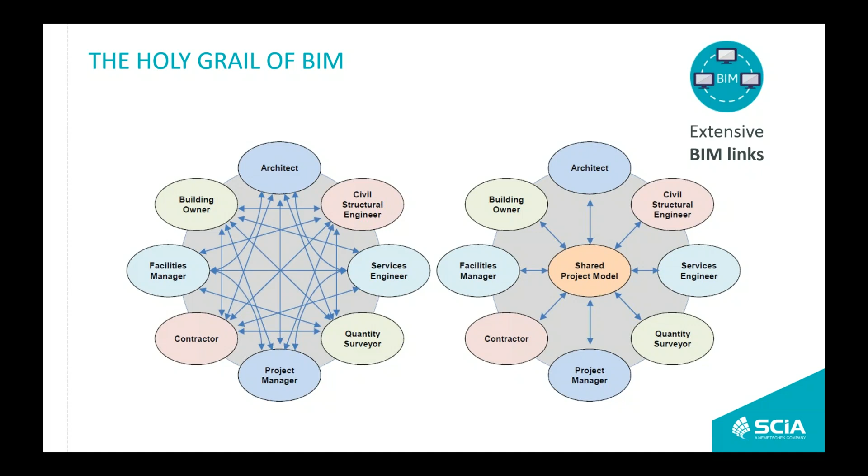Therefore, we are developing links with other software like Tekla Structures and Revit. But there is also one thing which should be clarified.

You can map, let's say, three models in practice. The first one is the architecture model, created by an architect in CAD software with all the details like furniture, cars, trees, people, etc. The middle one is related to the structural model, where you have some objects.

All the architectural details are removed, but it's still not what the designer needs for his work. The last model is the analytical model, which is the representation of the model with 2D and 1D elements, as we are used to in our daily practice.

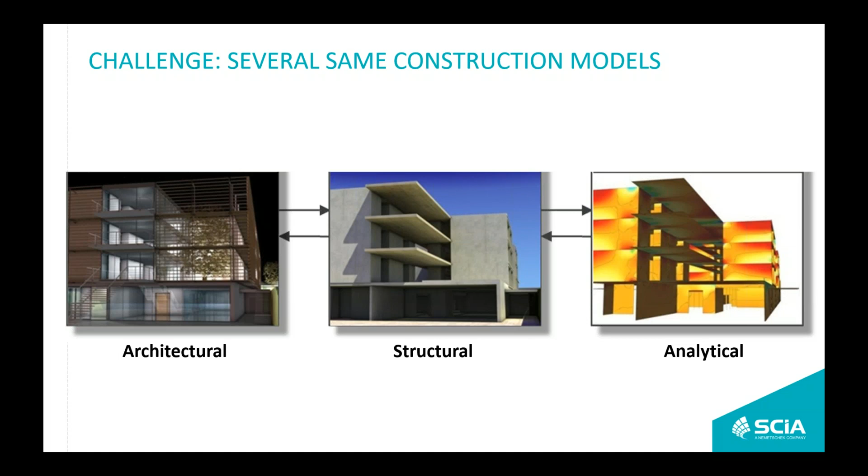I would like to concentrate here on two software packages, Tekla Structures and Revit. Both of these are able to create the last model, which is the analytical model, and we will work with this model in our webinar.

So let's start with the first link, which is related to Tekla Structures. Before we go to the details, I would like to ask you a very simple question: do you use Tekla Structures in your daily practice?

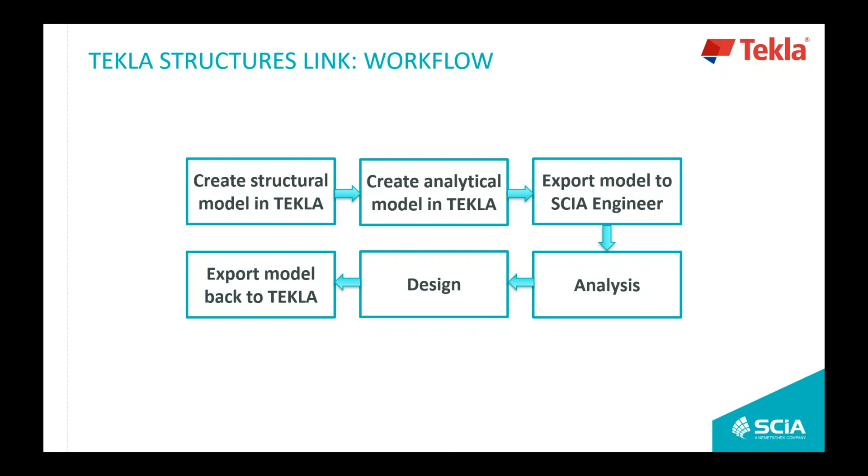That's, let's say, for me the ideal workflow between Tekla Structures and SCIA Engineer.

Here is what is currently supported in our link with Tekla Structures: the mapping of cross-sections and materials based on the Eurocode building standard and British standard.

Based on that, you are also able to import or export straight and curved 1D members, and import or export flat 2D members without openings. As I mentioned, we are able to export or import the analytical model, including supports, releases and rigid arms, and last but not least, export results from SCIA Engineer to Tekla Structures.

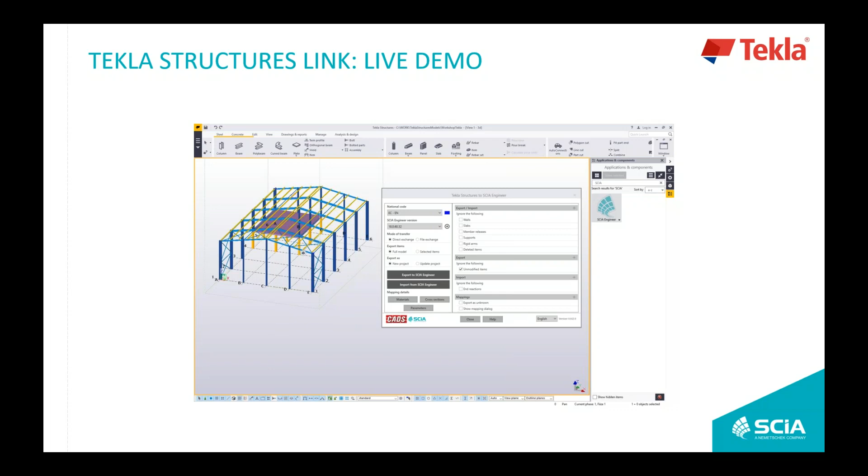And now it's time for the live demo in Tekla Structures. So I will switch to Tekla Structures. I hope you see my structure, which I got from my colleague, with concrete as well as steel. I have 1D and 2D members, and some bracings, and what I would like to do is export this model from Tekla to SCIA Engineer.

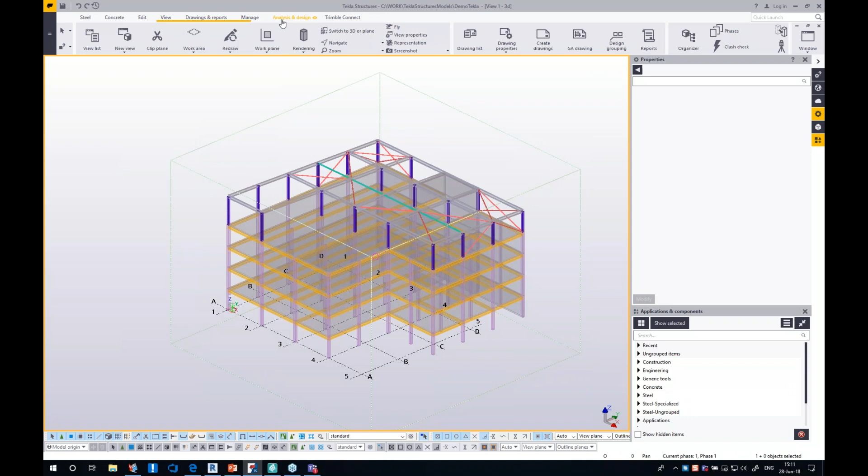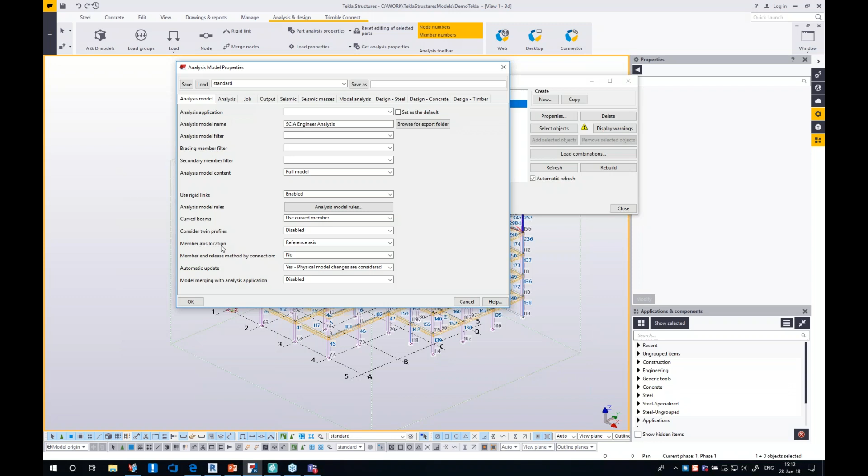What I need to do at the beginning is create an analytical model. There are several options for how you can do the analytical model - I have it prepared here. What's important is that you should pay attention to the member axis location to get a proper analytical model in SCIA Engineer. So I have my analytical model defined, as you see in the background.

Now I can just open the menu, application, component. I will start typing there, and with a double click I will see the dialog with the options.

So as I mentioned, I am able to select the national code, British standard or Eurocode, and I can also select the version of SCIA Engineer. I will try the last version of SCIA Engineer 18, 64-bit edition, and I will use the direct mode of transfer. I will export the full model as a new project.

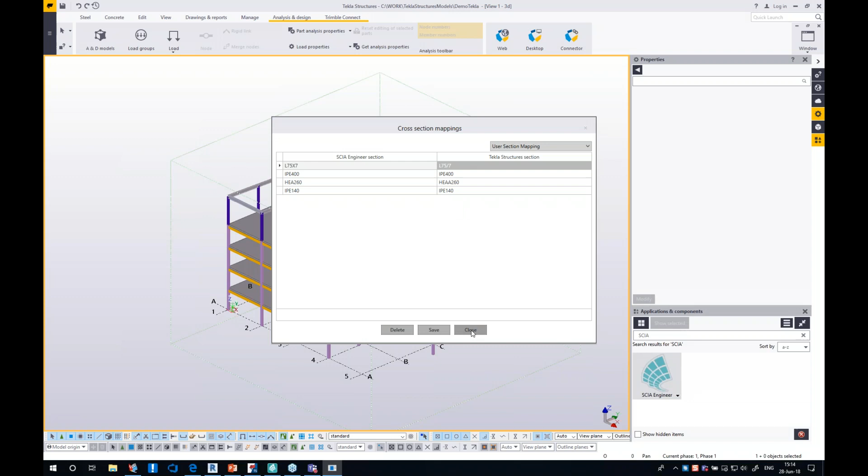Here I have the possibility to create my mapping. I'm able to do it for materials - here you can see what I already mapped, material in Tekla Structures and material in SCIA Engineer. The same I can do for cross sections - I'm able to see that I map this L profile to that profile in SCIA Engineer. If you have no mapping tables, you will be asked during the export to create a mapping with a simple dialog.

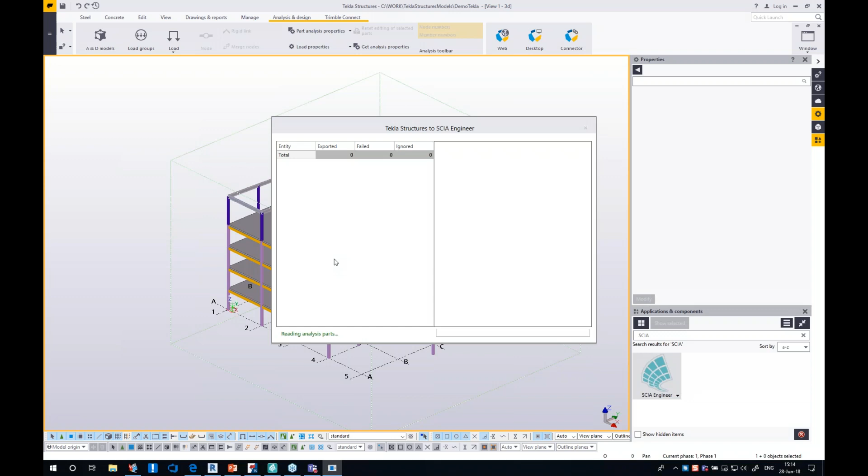So I will push the button export to engineer. In the background there is a translation which reads the analysis part defined in Tekla Structures. It will take some time. And now in this window, you can see the status was currently transferred.

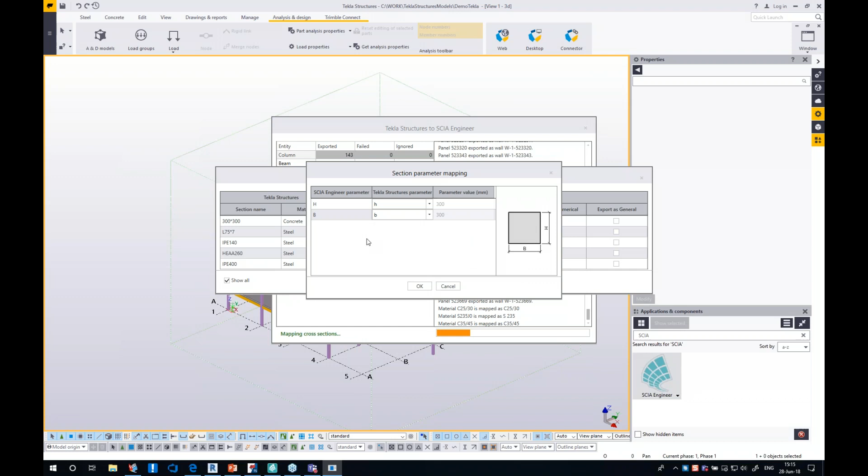Here you can see the mapping - it asked me to map this element, so I already did it and saved it. And now it's starting SCIA Engineer, opening the project in SCIA Engineer. Here on the last line, you can see it creates some file in the folder in the background, so you can also open it if you want.

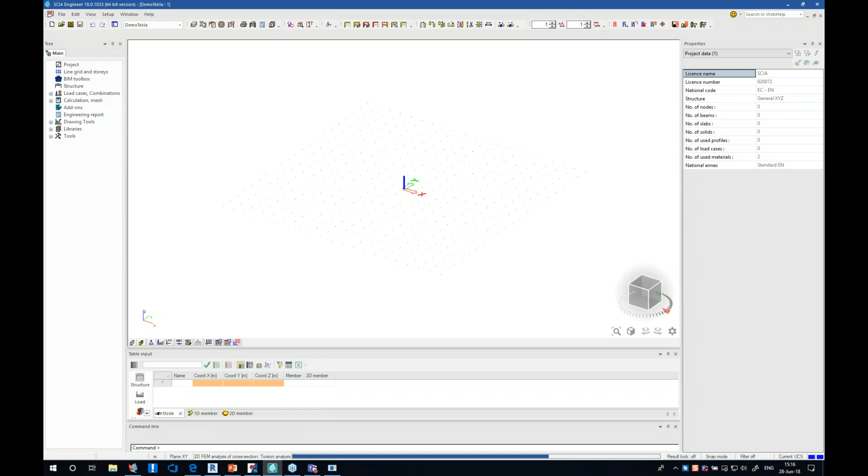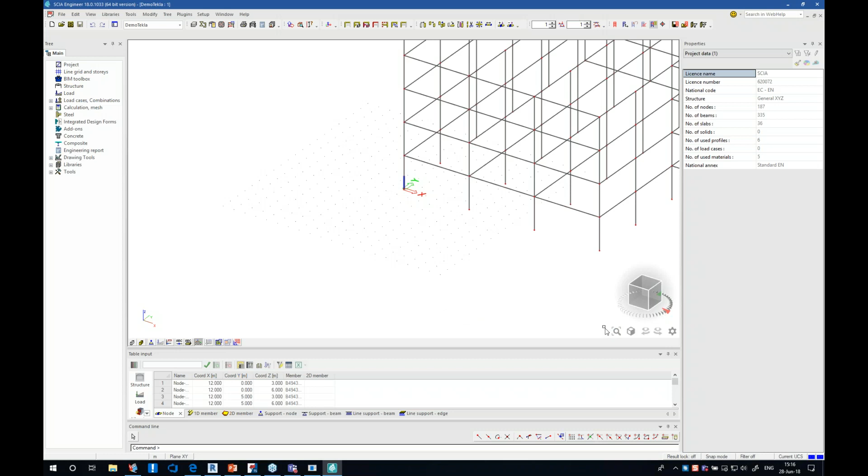So here I have my engineer. I will wait for some analysis of cross sections for the members, and we will be able in a couple of seconds to see the whole structure. When I have my structure in engineer, I will enlarge my view, and you can see that everything I had in Tekla was exported, and I'm able to see it in the engineer.

I have here one load case, that's self-weight, and here, if I go to the service structure, I have also supports which I already defined in Tekla Structures. And now I can run the calculation, and I will get the results back.

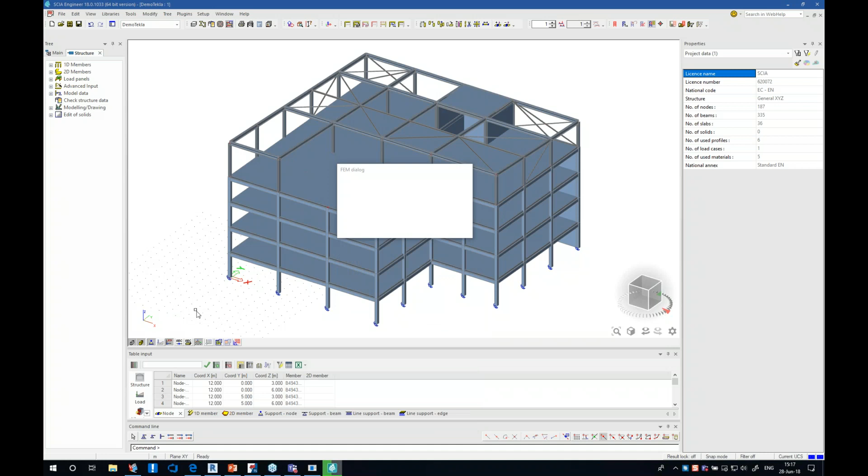And before the linear calculation, I will wait on the results. Okay, almost done.

So I have calculated results for self-weight. I will, for example, display the results for 1D internal forces, for normal force.

And now, as I have done what I need to in the engineer, I will go back to Tekla Structures, to the dialog, and I will push import from the engineer. In the background, it will read the engineer project, and then it will transform it to Tekla Structures.

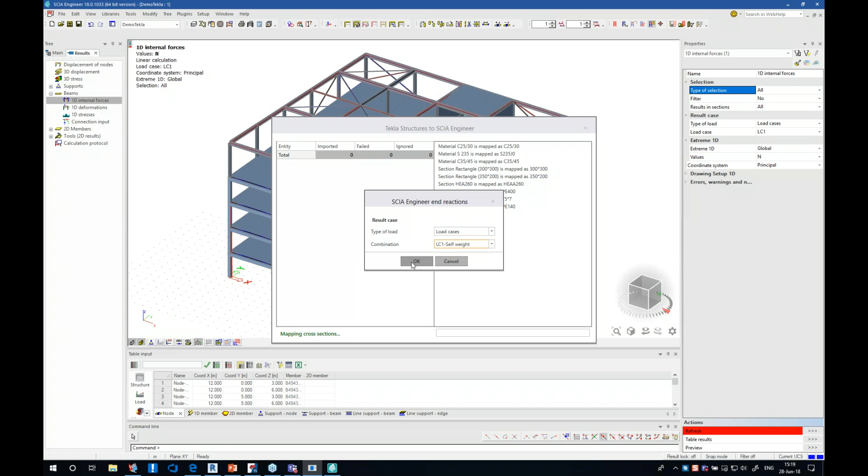It's mapping materials, and as I said, I'm able to export also results coming from the engineer. There is a dialog where I can select the type of load, and as I defined just one load case for the demonstration purposes, I will select the load case - I have just one, so it's LC1 self-weight.

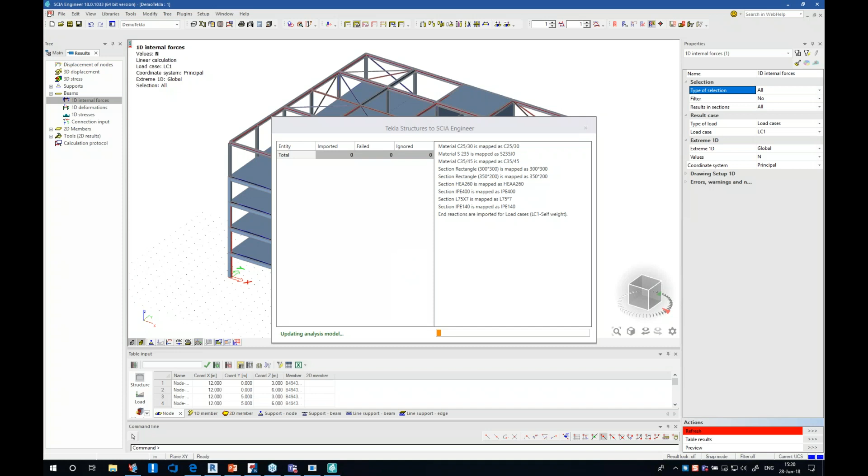I will push OK, and now the model in Tekla Structures is updated with all the possible changes which I could do in the engineer, plus the selected result.

So I will wait until the import is finished, and as you can see here, you have all the necessary information about what is going on in the background. You can see also the progress, saying that it's updating, and now it's reading results, updating support conditions. So we are, I think, at 2/3 of the export, as I can see on the progress bar.

So I will wait. Everything is done successfully. Here you can also see which entities have been imported, with how many of them failed and ignored.

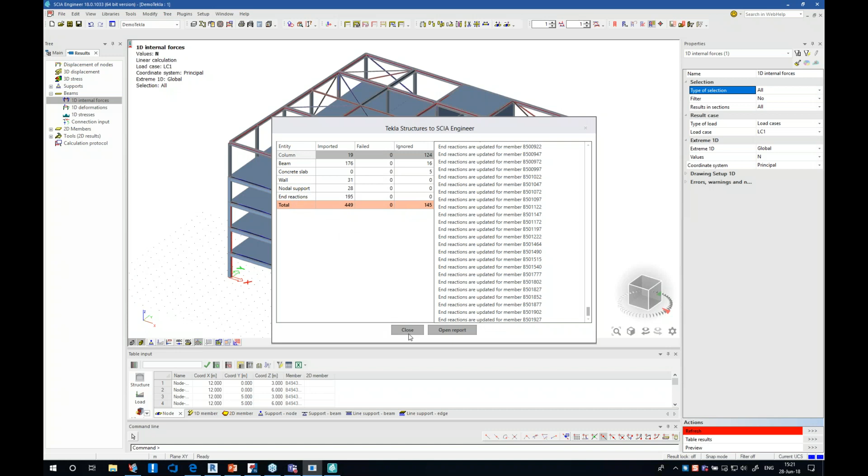I will close the report and switch back to Tekla Structures. The question is how should I check, for example, the end reaction. So I will pick this column, and here in the custom properties, I have an option 'more'. I will click on more, and here, okay...

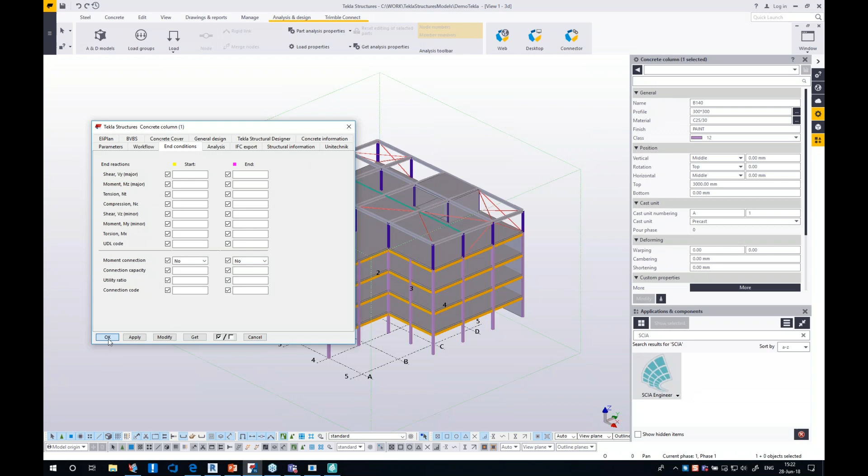Doesn't do anything. Normally, you would see it here in the end conditions. So that's a pity that I wasn't able to demonstrate it.

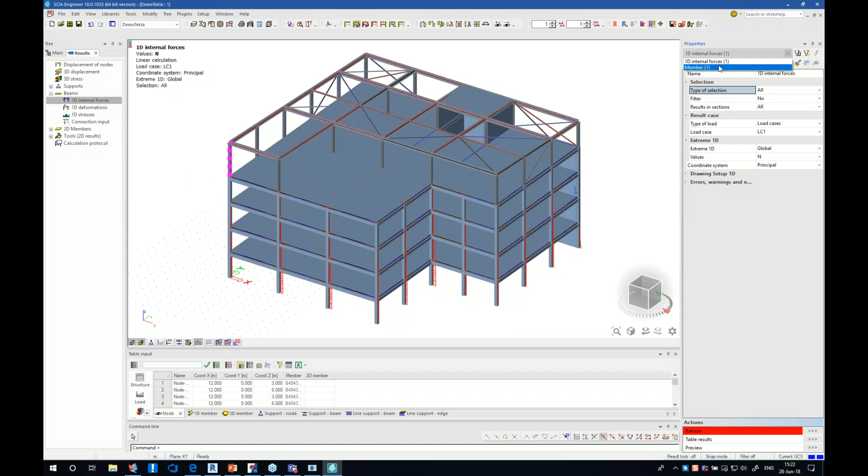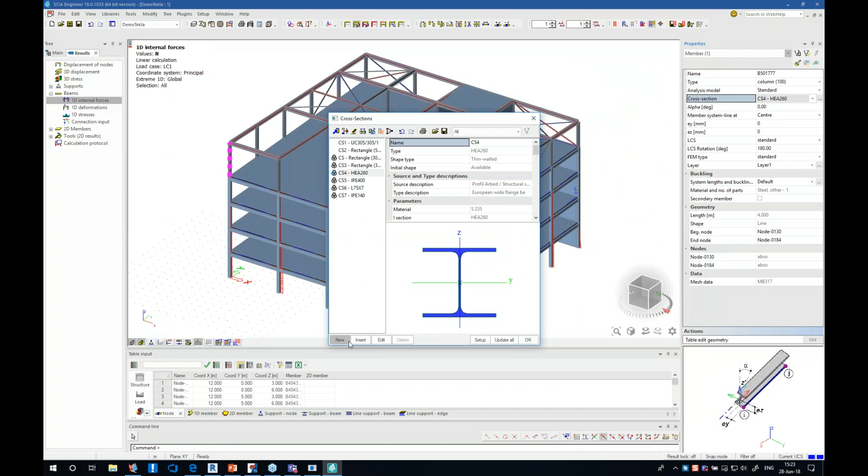What's also possible is, if I go back to the Engineer, is that, for example, I will change the cross section of this column from 260 to the new one, for example, 400.

Okay, close. I will erase all the calculated results. So here I did a change, and now I would like to propagate it to Tekla Structures.

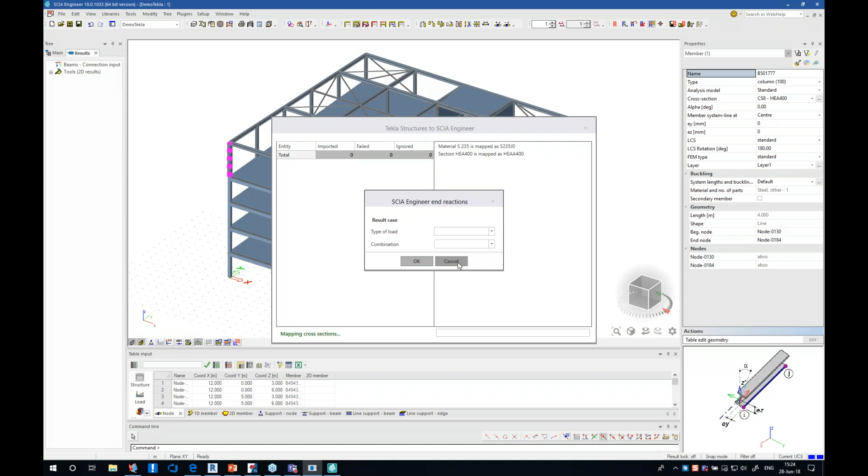So I will run export, and before I do it, I have no results, so I will cancel the selection.

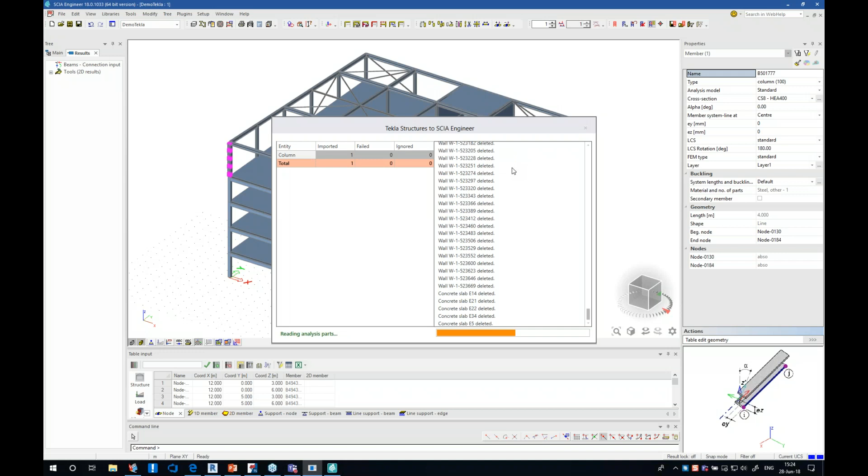As you can see, the section 400 is mapped, and now the model is updated. I will switch it back here. You can see that the profile changed, and that's all what I would like to share with you related to Tekla Structures, and we will continue with Revit.

I'll go back to my presentation, as I did it for Tekla Structures. I would like to ask you if you use Revit in your daily practice. Let's take 2 or 3 minutes for collecting responses.

And meanwhile, I will also have a look at questions. So it seems that no one is voting...

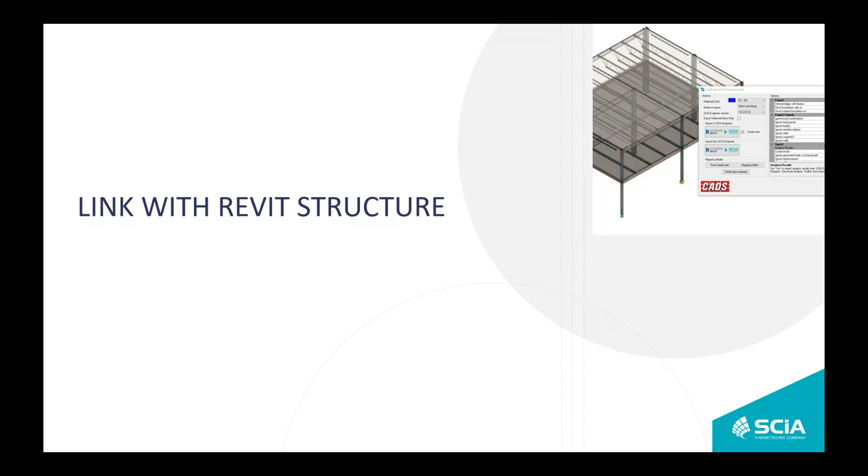Okay, it's similar to the Tekla results, 41% saying no and 59% saying yes. That's nice, and I will continue with my presentation.

For me, let's say the top features for Revit structure is mapping tables - that's the possibility to map materials and cross-sections in Revit to materials and cross-sections in Engineer. That's also the possibility of the usage of direct link, or the possibility to create a file for your colleague.

Export results from Engineer, and also the possibility to just update the profile where the geometry is kept - meaning you can slightly move a column or beam in your analytical model in Engineer, and then during the update from Engineer to Revit, you can select that you would like to update just the profile or just the size of the member.

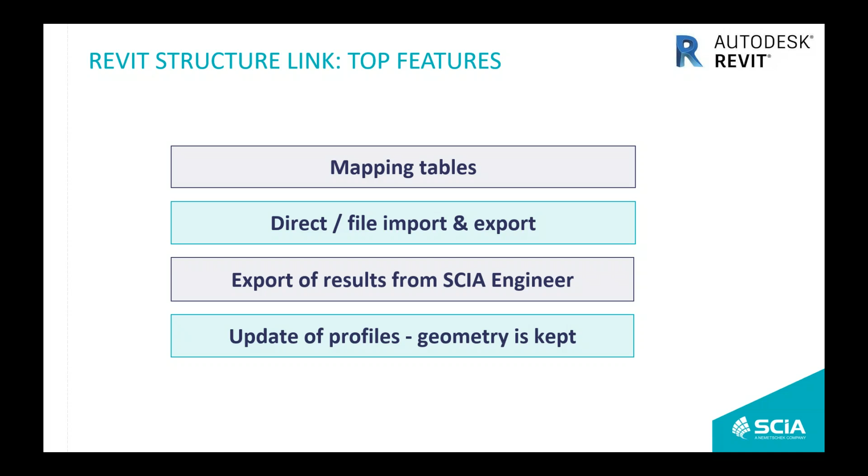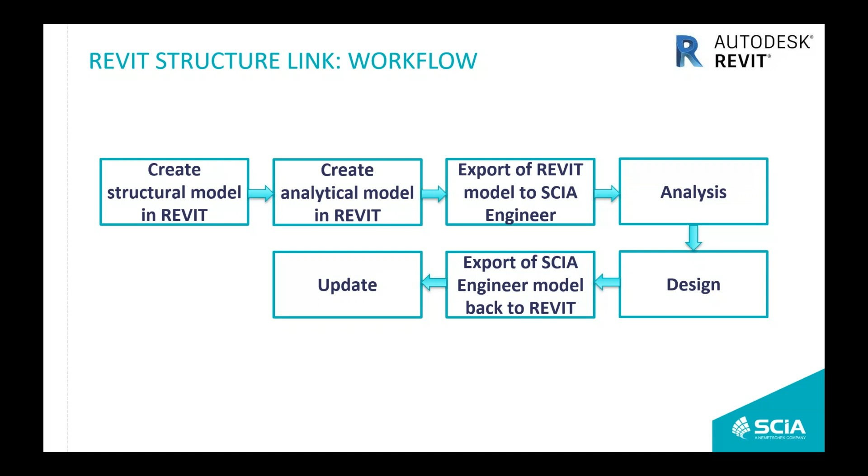As in the case of Tekla Structures, the ideal workflow, at least for me, starts with the creation of a structural model in Revit. As you know, Revit is able to create an analytical model. Then you are able to export the Revit model to Engineer, do the analysis and necessary design, export it back to Revit and do the update - so that's perfectly possible to do round tripping.

What's currently supported in our link, as I already mentioned, is mapping of cross-sections and materials, possibility of import of 1D as well as flat 2D members, import and export of foundations and supports, and import and export of loads, as well as export of results. What's really new in the link, contained in Engineer 18, is the possibility of export of reinforcement for 1D as well as 2D members. We will see it on the next slide.

So you can do the reinforcement design in Engineer. You can create the real reinforcement, or the practical reinforcement, in Engineer, and then you can export it to Revit and do the detailing. That's one thing that's really new.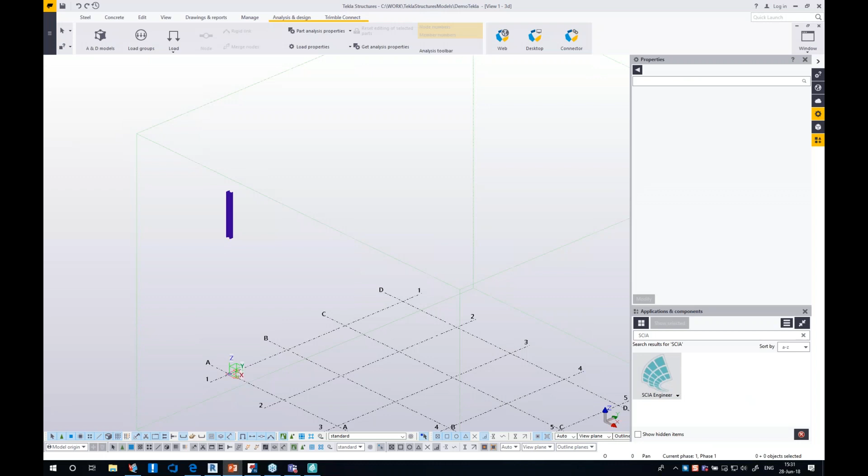And as I did for Tekla Structures, now it's time for the demo. So I will switch to Revit. Here I have my structure created in Revit - that's the, let's say, composition of the concrete and steel part.

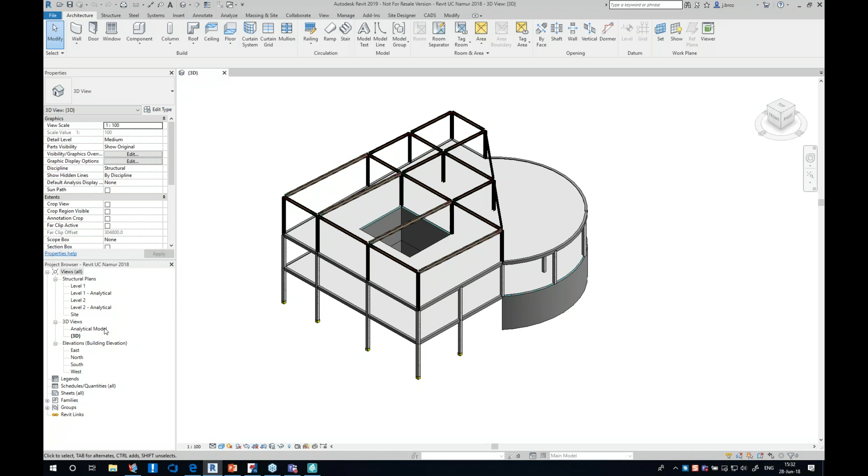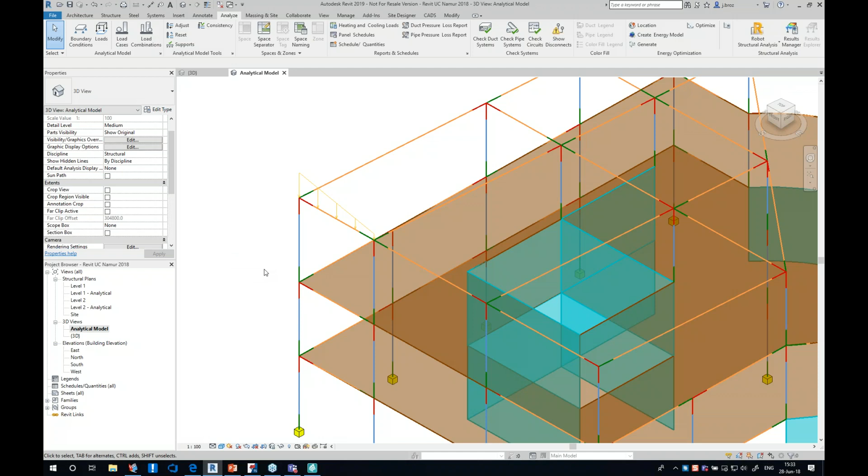I have my analytical model with some support conditions and with the load, and I would like to export it to SCIA Engineer.

Here's the possibility how I can do it. That's the well-known dialog for export of models from Revit to Engineer. What's new, and wasn't mentioned during my presentation, is the possibility to create levels in Revit based on data from the work you did in Engineer - definition of levels based on the slab surfaces or slab levels, or based on the stories you create in Engineer, or the last option, levels you already defined in Revit.

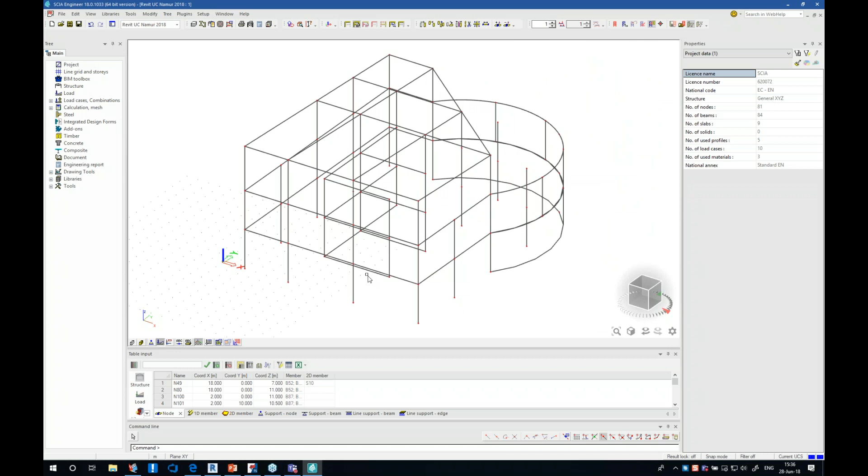So export to SCIA Engineer is done. I will close this dialog and switch to Engineer. I will use this rendered form of the display. As you can see, all what I defined in Revit is exported - 1D, 2D members, support.

If I go to the load, you will see that I defined the trapezoidal load in the load case, load 1, and here it's displayed.

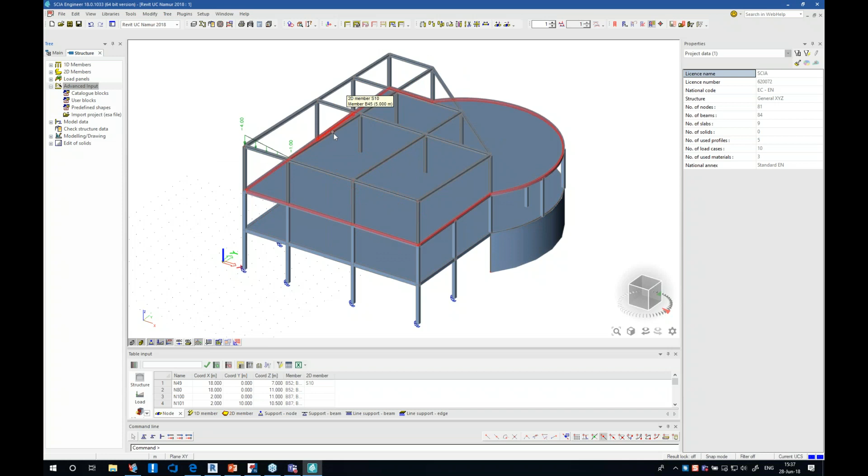So I can run the calculation, do the design, and besides the reinforcement I would also like to show you the possibility to export load panels or rigid diaphragms. As a designer, I would like to create some roof here on top of the structure. So I will go to the members, and I would like to create this metal deck. I will select the sheeting.

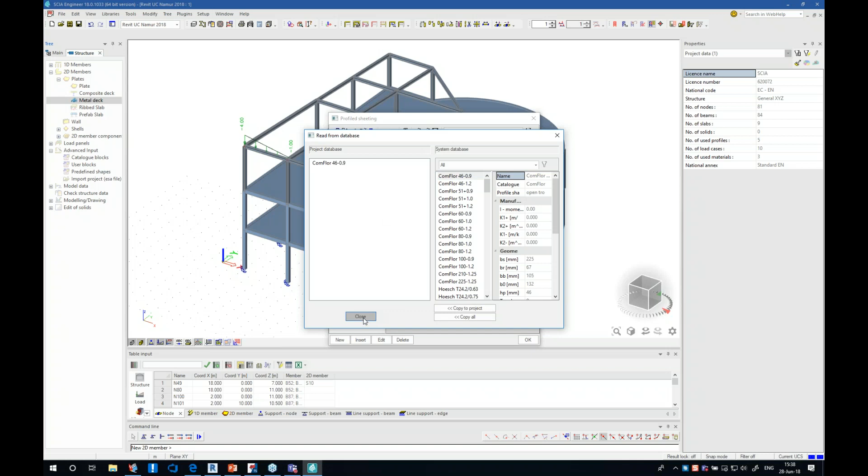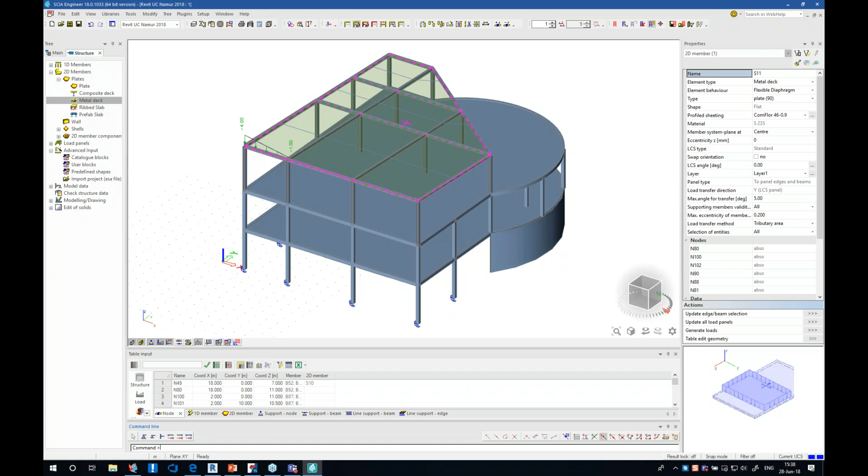Now I can create this very nice roof, and continue with addition of the load on top of this diaphragm. It will be transferred, as you can see here, to the tributary areas on the supporting elements.

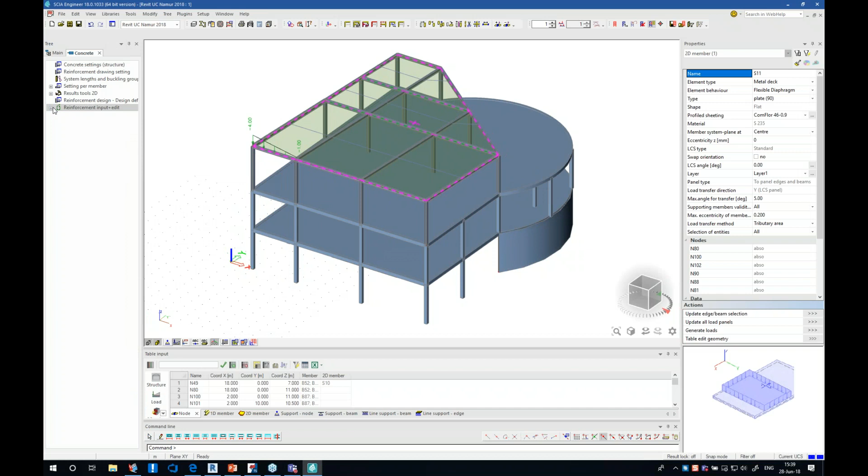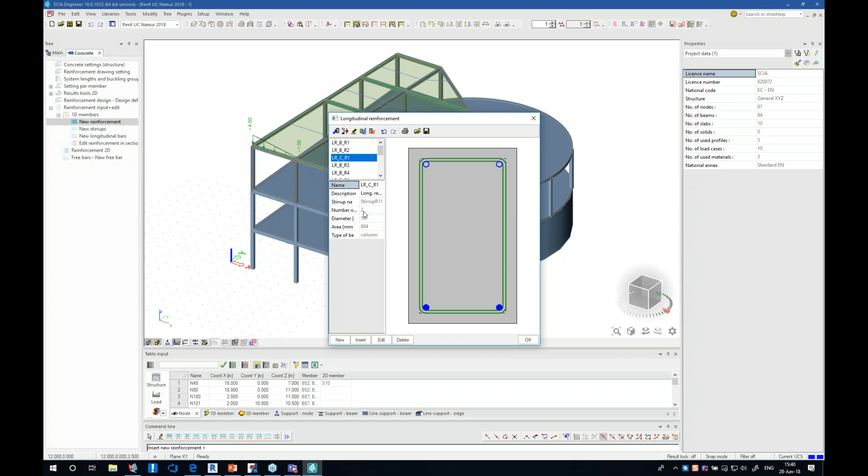So imagine that I did it, and now I would like to also reinforce my structure. I will go to concrete and start directly with input of the reinforcement, for the 1D members. I'll click on new reinforcement and select the member - the column, start point, end point - and select some predefined template for reinforcement.

Let's say that it will be this one. I will accept it as it is, and now switch to the wireframe model to see my created reinforcement. I will do the same for the beam, selecting this kind of template, and accept what is offered.

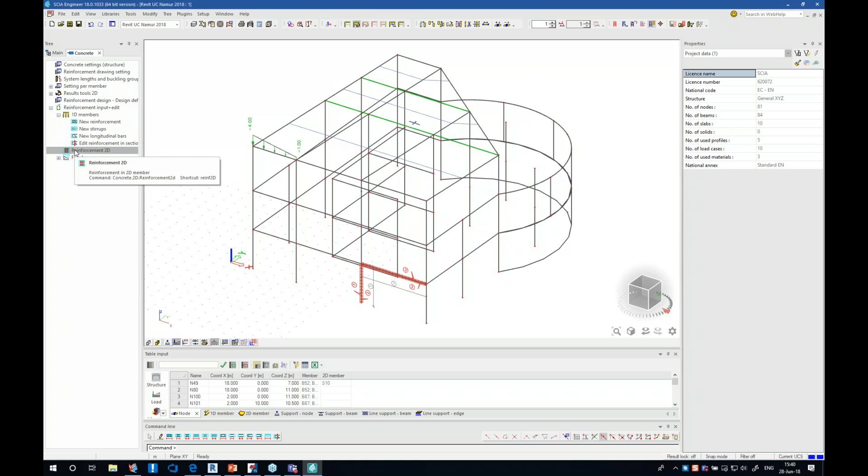So I reinforced this column and the beam, and I would also like to reinforce this slab. I will just use bars with this material on the lower surface. I will accept everything written here, and start creation of the region.

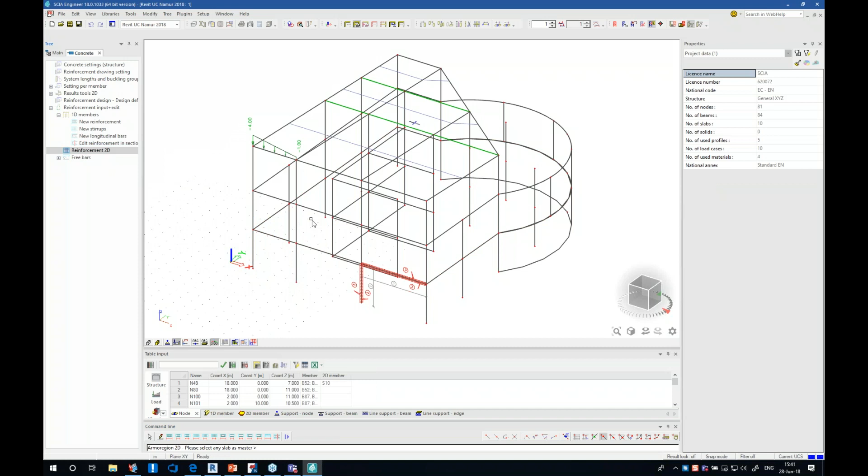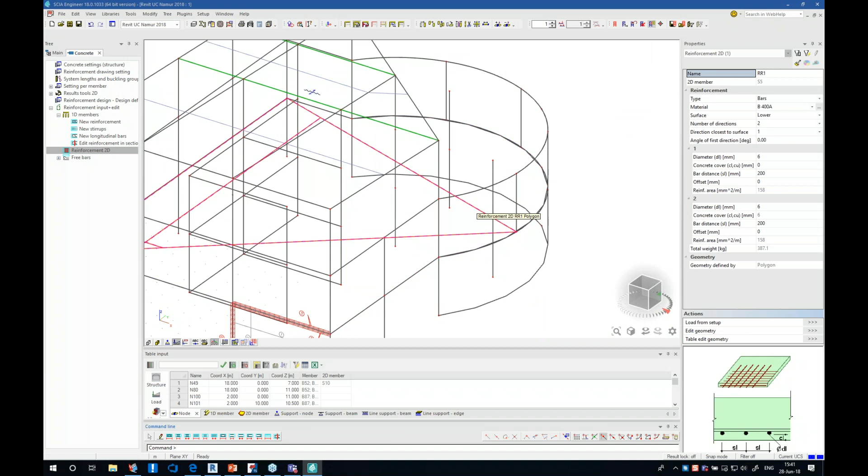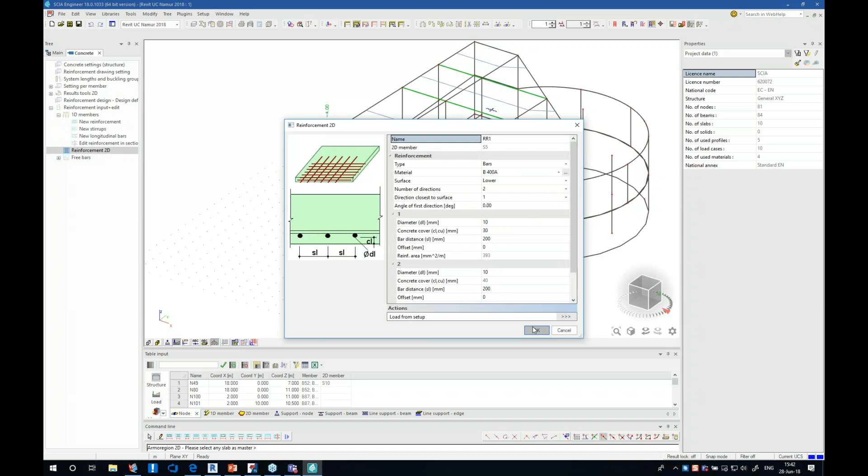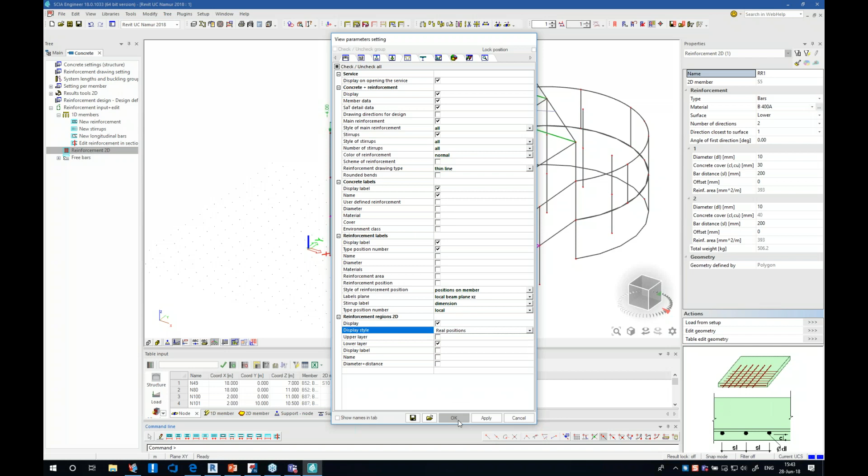I'm not so skilled a designer of concrete, so be patient with my style. I hope that I have everything I wanted... still not sufficient. So I'll... okay, I was successful. Thank you for your patience with my effort. Here you can see the region with 2D reinforcement and with 1D reinforcement.

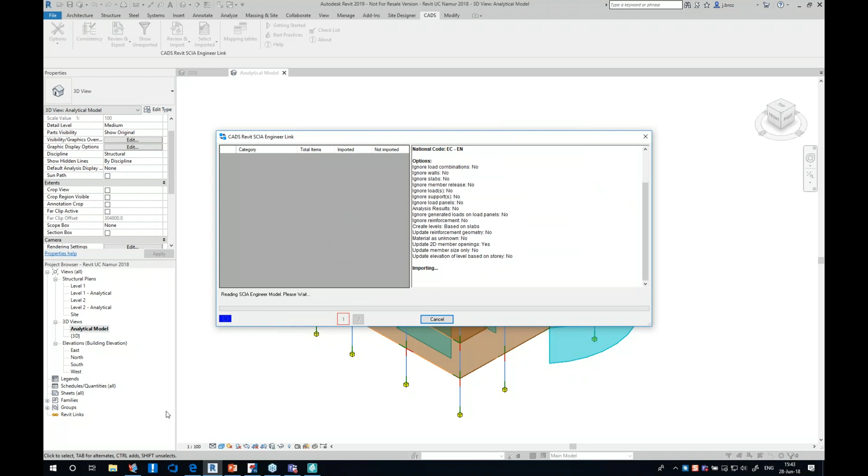I will go to Revit and start import from the engineer. Now it's reading all that I defined in Engineer - all the loads, all the combinations which are created.

It's also asking about the mapping of reinforcement steel, so I will use what's proposed. I will save it, and now it should continue. So we will see the mapping of rebars of diameter 10 to the Revit rebar type 10BE, etc.

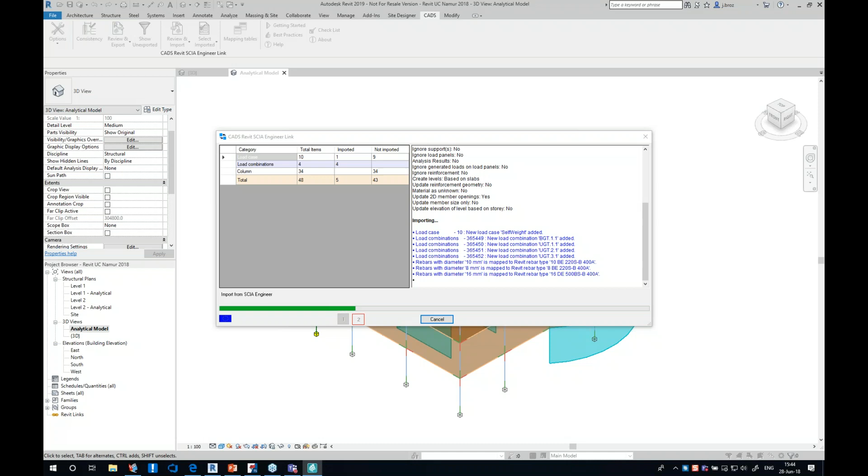On the left hand side, you can also see the actual status of the export - what's imported, what isn't imported. In fact, I just created one load case in Engineer, which is a self-weight load case. The 9 load cases have already been created in advance in Revit Structures.

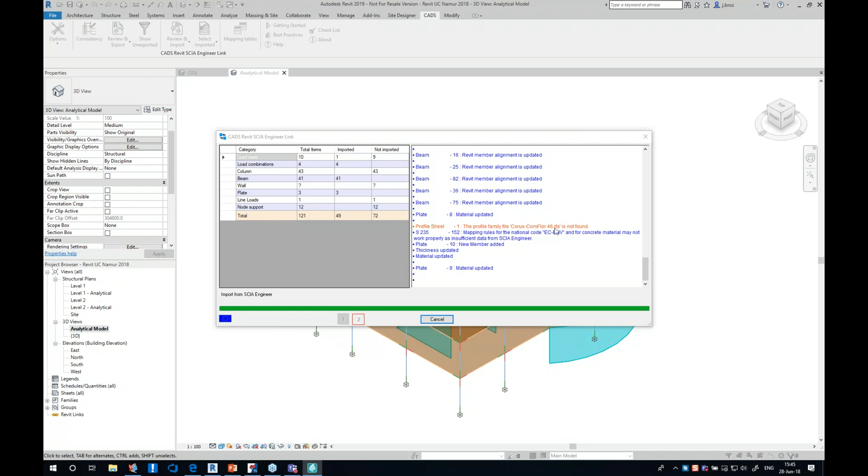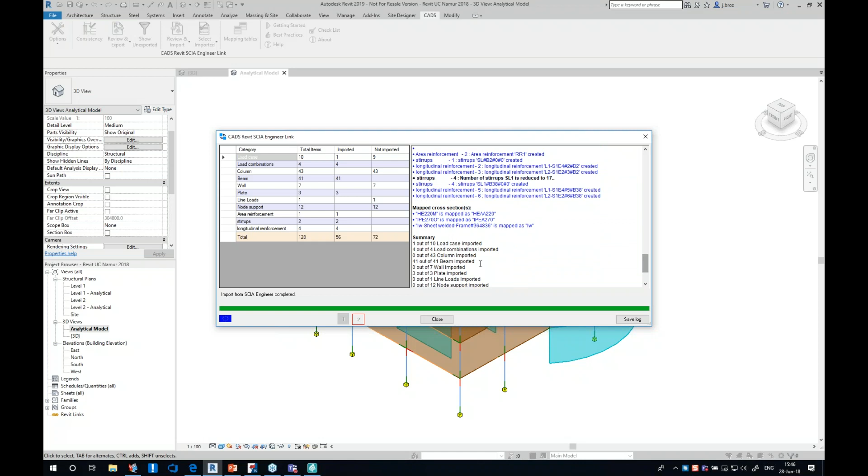What I haven't done is provide the profile family for sheeting which I selected in Engineer, and here you can see I get a warning that it's not available in my installation. Below, you can see some area reinforcement, stirrups and longitudinal reinforcement, what's mapped, and also the time which I spent.

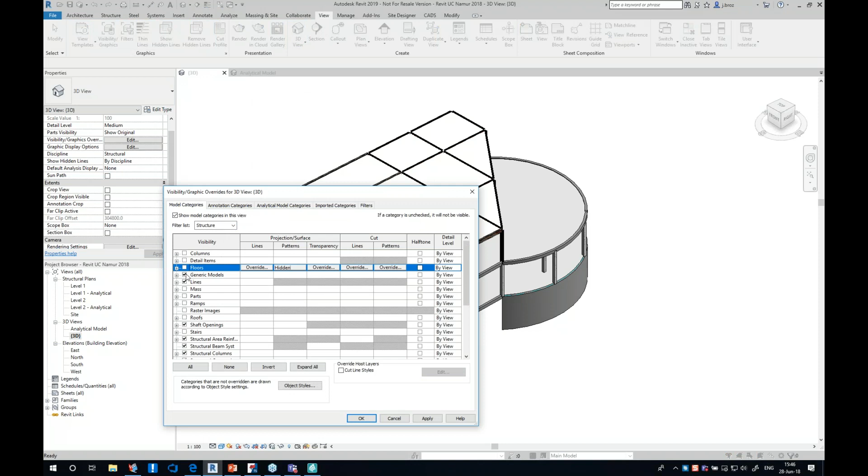So let's close. What I would like to do is just see the reinforcement, for example.

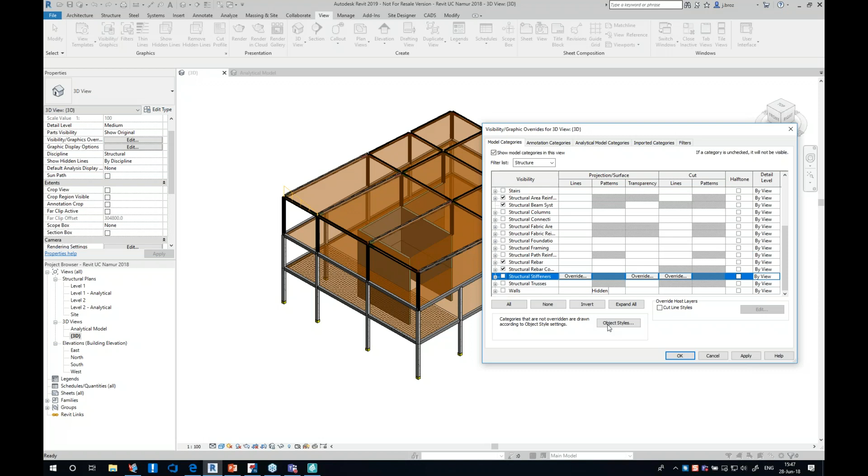So here is the 3D, and if I'm successful in switching all the things I'd like, you can see that here is reinforcement for the column with longitudinal bars and stirrups, and the same is also possible for beams. If I click on the rebar, that's the real Revit rebar, so you can use all the detailing tools available in the Revit application.

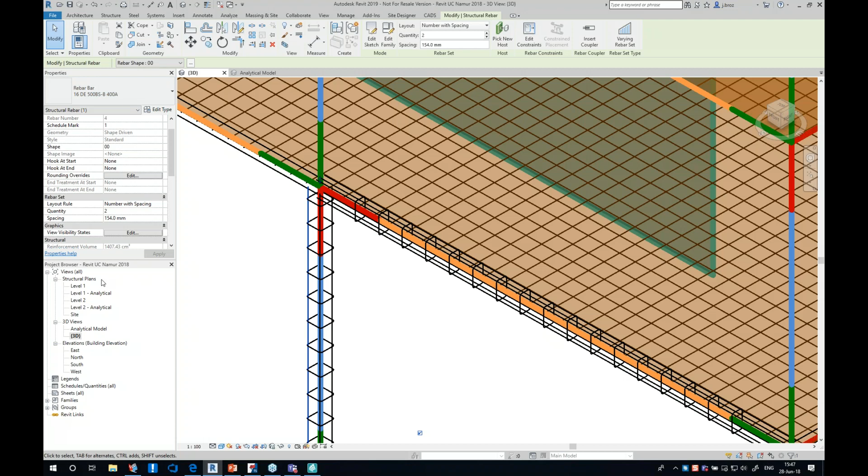As you may notice, when I started in Revit, there wasn't any 2D element, and now there is an element which I defined in the engineer as a metal deck, or so-called flexible diaphragm. This possibility is also possible for our load panel.

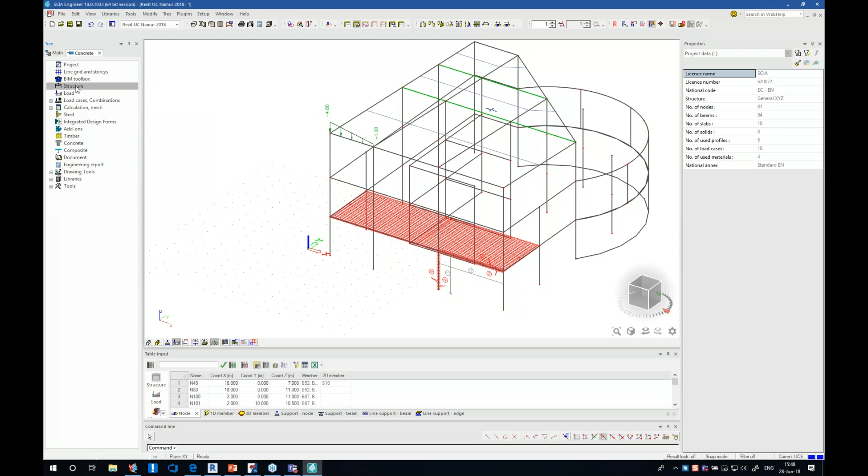So if you create a load panel in SCIA Engineer, in menu structure, that's also what could be exported from SCIA Engineer to Revit. Here you can see my metal deck that I selected as a one-way slab, with all the things related as material and information about the load.

About the sheeting. And I will go back to my presentation. So we had the Revit structure link live demo, and that's it what I wanted to present to you.

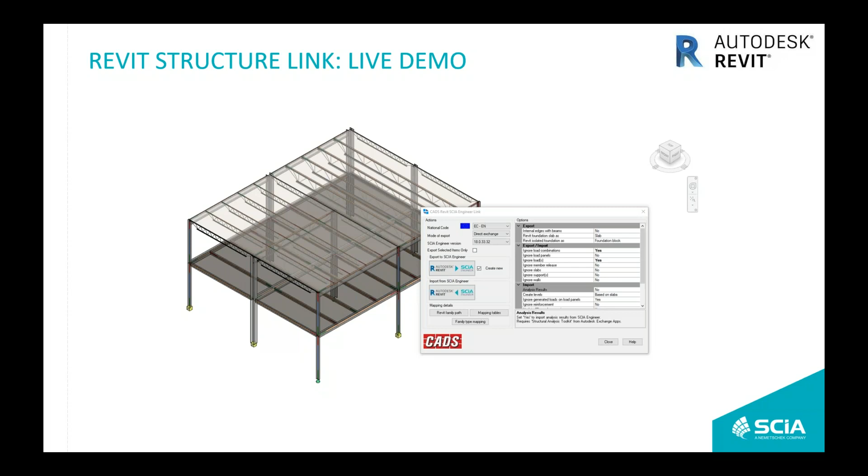There is also a question: I can see the gap between the wall and curved beam, how do you explain it? I think this is basically what I think was also the previous question, and that's the problem with the creation of the curved edge and the curved element underneath. I think you should be able to improve it. If you ask one of our experts on technical support in our customer connecting, they should be able to help you refine it and select it.

I will read some other questions as we have 5 minutes. There's a question: can the rebars imported from SCIA be scheduled in Revit schedules? Yes, as it is the Revit native object, I hope you are able to just click here in schedules quantities and then do what you are used to do. As you may notice, the providers of the link are CADS, and they have their tools for detailing in Revit, so that's already possible.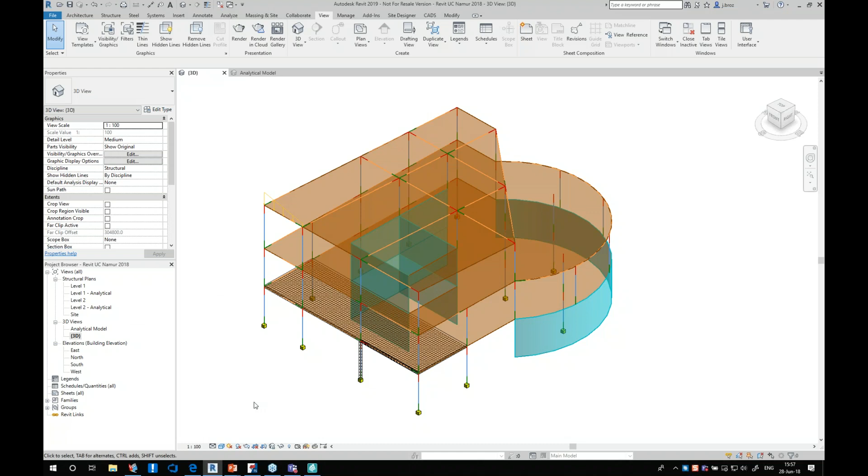Here is a question: when is the engineer going to connect and do things with Vectorworks, which is a Nemetschek product, rather than using Revit? To be honest, we are orienting ourselves on Revit and Tekla, as they are used a lot in Europe, and that's the CAD-like, or in the case of Tekla Structures, also the fabrication software. In the case of Vectorworks, Allplan, or any other CAD software, we are able to import and export IFC files. We are able to import IFC 2x3, where we are certified, and the same possibility is valid for IFC 2x3 compressed. In the case of Allplan, there are some special rules in the background. You mentioned the Nemetschek product, that's also, for example, SDS2, and you can see we are able to export to SDS2. So we don't have any particular connector or link with Vectorworks, but you can do it through IFC, and that's, for example, the same for Archicad.